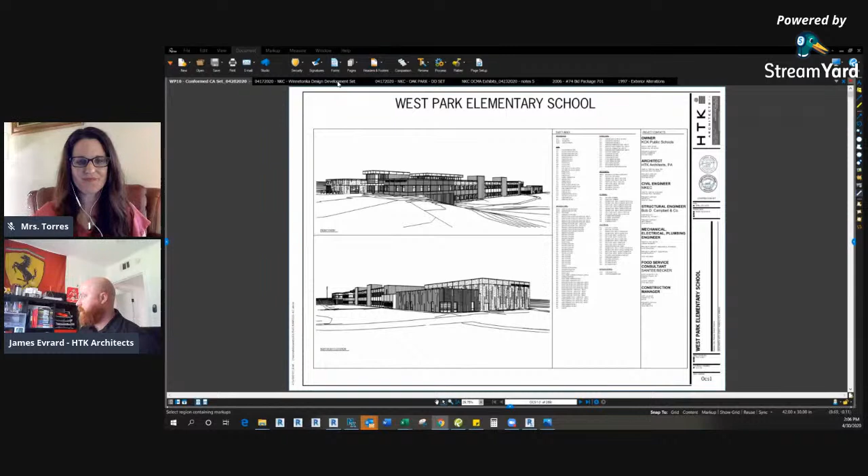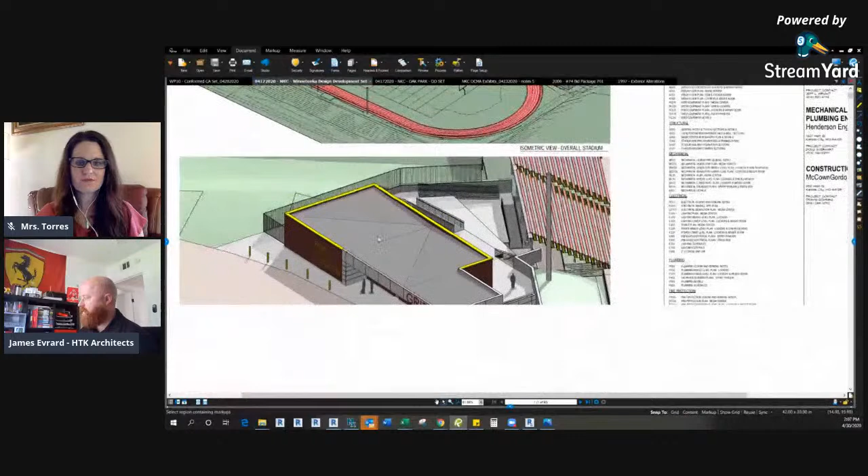So part of what I'm doing at North Kansas City is we are doing some stadium upgrades for Winnetonka. For the first time in the 50-plus year history of the school, we're adding a stadium component. We're also doing a new sports pavilion, a place to enter and have fun, extending the experience of the school to the fields, since the football fields never had a place to congregate and socialize.

So I'll go through some of the drawings that we just put together. Let's see, get to a fun plan. Sorry for the lag time.

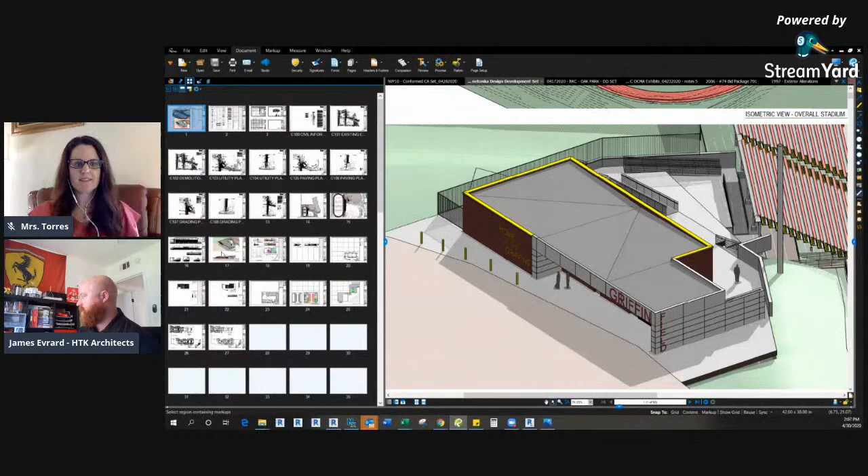While you're pulling that up, could you share what software program you are using to create these? Yes, so this is being created in Revit, Autodesk Revit 2020. It's a 3D modeling software we use to develop all the creative aspects of the project, but also the nuts and bolts pieces. So you can see here that this is all in the model that the image I showed.

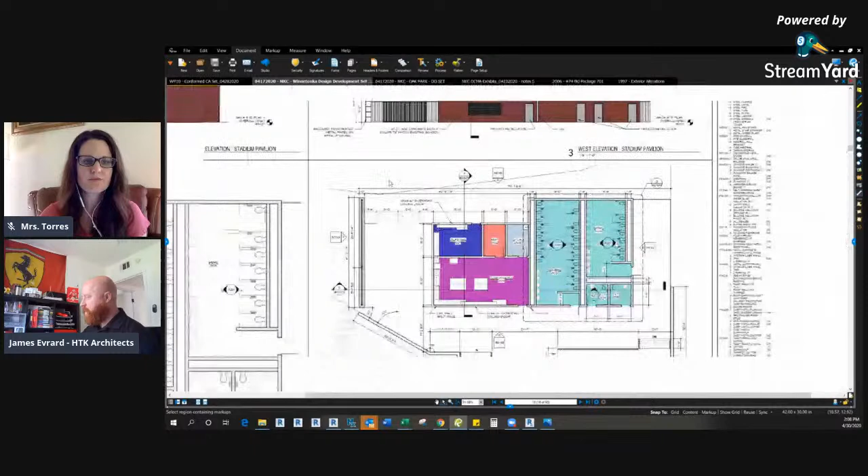So you get into the structure of it, how it's supported, various pieces like plumbing, wiring, infrastructure, all to help create these buildings that we are modeling virtually. So I still hand draw a lot, but ultimately those squiggly line drawings eventually translate to these very measured models.

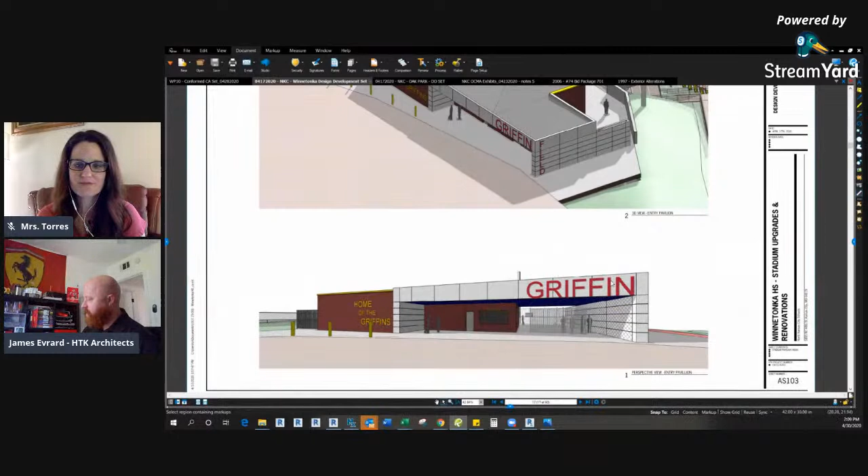So this is just one of the pavilion buildings that we did. You can see some of the 3D views of it that are part of this model. So modeling the brick, custom signage, metal panels, looking at how people interact on the site, and how close we are with the stadiums themselves.

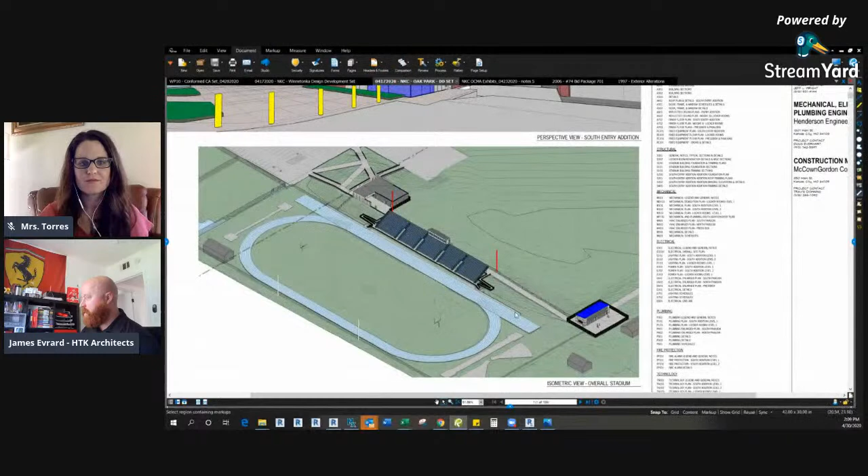So that's something going on at Winnetonka. I'm also doing some fun projects that are a little similar at Oak Park, where we're doing also a new stadium bleacher section. But then we're doing some other pavilion buildings - there's a home building and a visitors building, and these will help broaden the experience of the students and community alike to experience these projects.

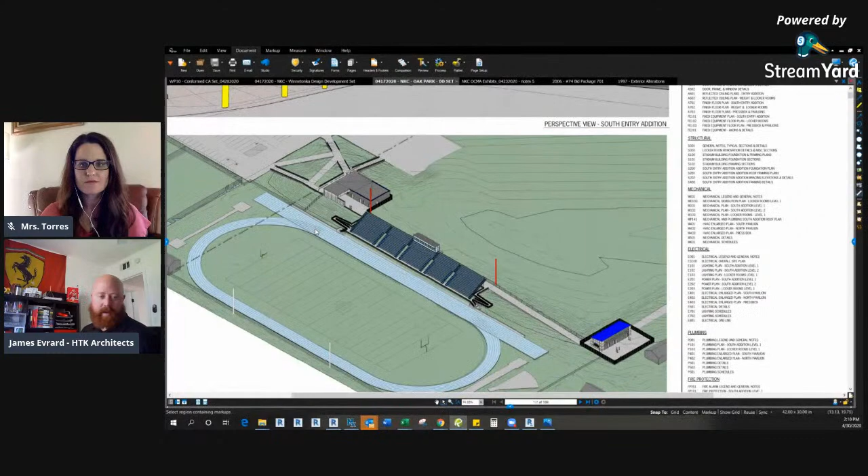Because once again, Oak Park was designed with just the track and the football field, but no bleachers. So it's trying to enrich the school through design and expand it, trying to figure out the legacy of where the school wants to go, but also provide really fun opportunities for students such as yourselves to take part in. Another fun project we're doing is a whole brand new entry to Oak Park itself.

So this is actually on the south side of the school, where the original entry is on the north. With the way the school has functioned over the years, the majority of students and faculty all experience the south. So now we are actually trying to flip the whole thinking of the school on its end and design and add to the back of the school, redefining its entry sequence.

So a very new prominent entry. And if you're familiar with the other schools, Winnetonka itself actually just went through this process. So it's kind of a nice opportunity to be able to expand on a very historic school and then redefine how it works moving forward.

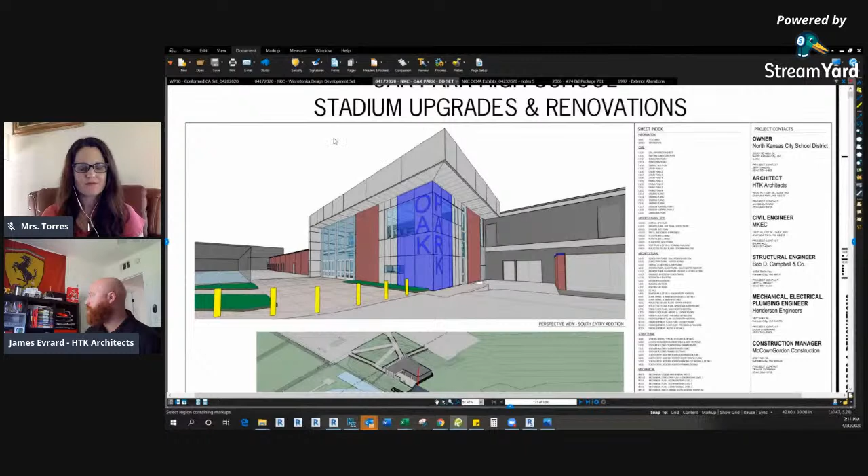So let's see, I'm going to share another screen of what I'm working on. As I said, this was Autodesk Revit. So if everybody can see, this is the addition I just showed at Oak Park. Just to give you guys a little taste here, it's kind of crazy that we build all these things - you can see how big the model is.

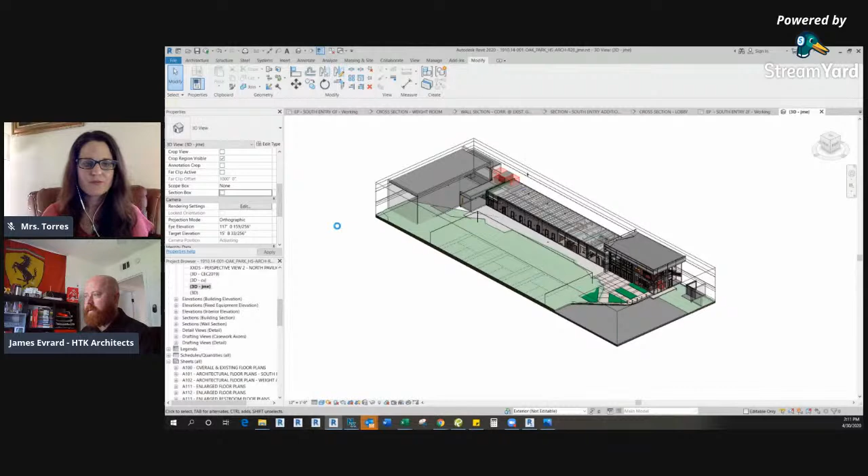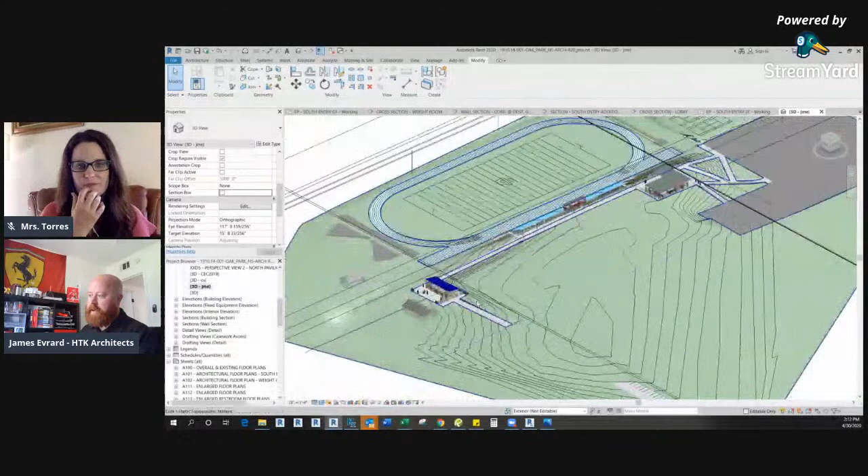So there you go. So I've modeled basically the entire existing school, and we have the topo model of the site itself all the way to Paseo, or Troost, and then we have the pavilion building, the new press box on the stadium, and we have the South Pavilion that will be part of Gladstone Park.

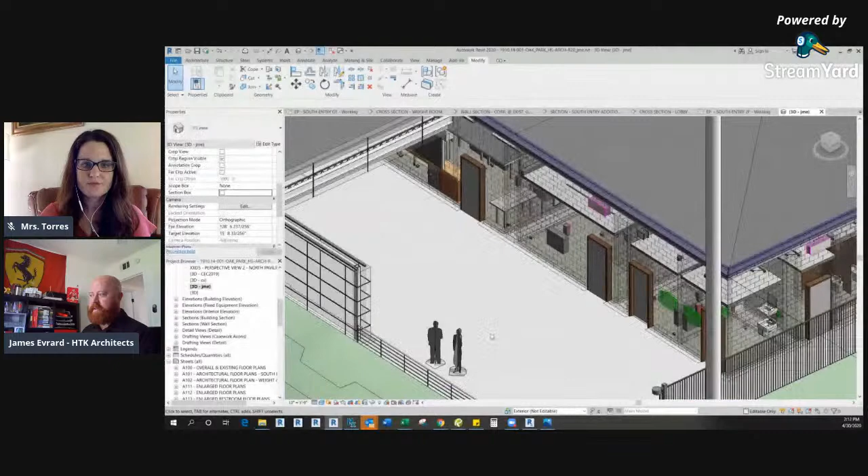So you can see it's understanding and drawing, figuring out all these different projects located on a site and being able to interpret and figure out. So you can get all the way down to the detail of the people, the doors. You can see sinks in the model itself. So it's understanding all these components, how they work.

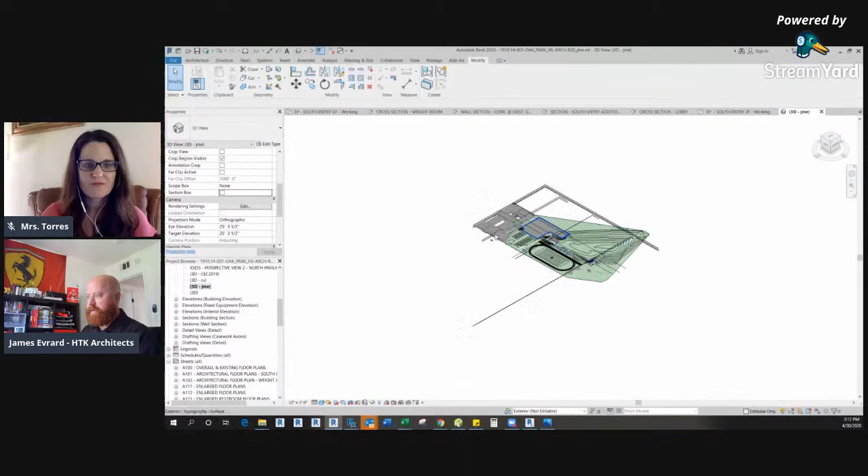And then the other fun thing you get to do is kind of break through them. Let's see, I'll go back. And then you draw these orthogonally and also digitally. Let's just go back so I don't lose my place.

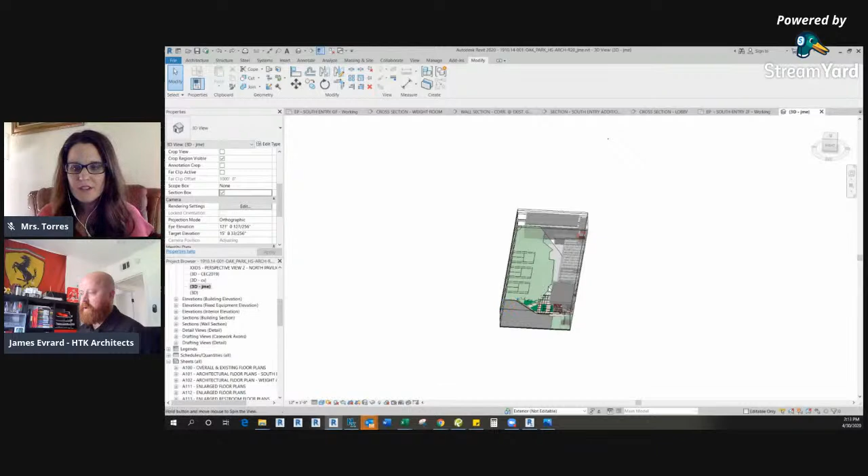So this is the entry addition that I'm working on, and you can see how all the bits and pieces of the project are displayed.

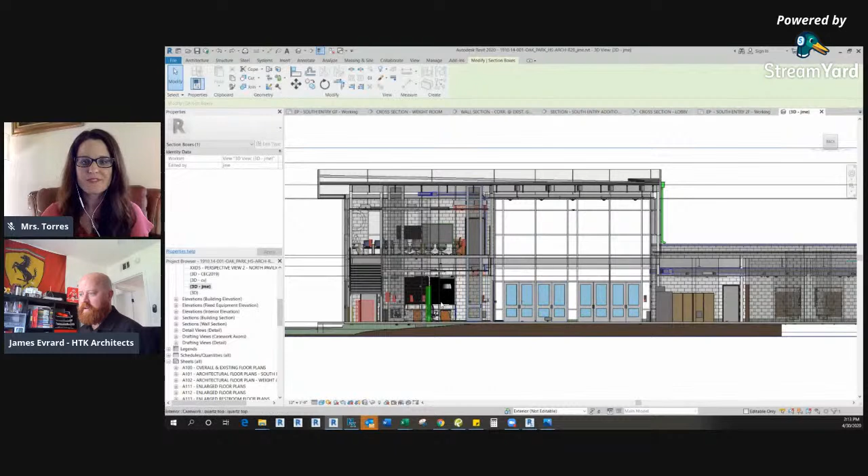This is looking through the model of the entry. You can see sites, or the circulation of the stair, rooms beyond it. This project has a new weight room, so we're working on designing that and how it interacts with the school.

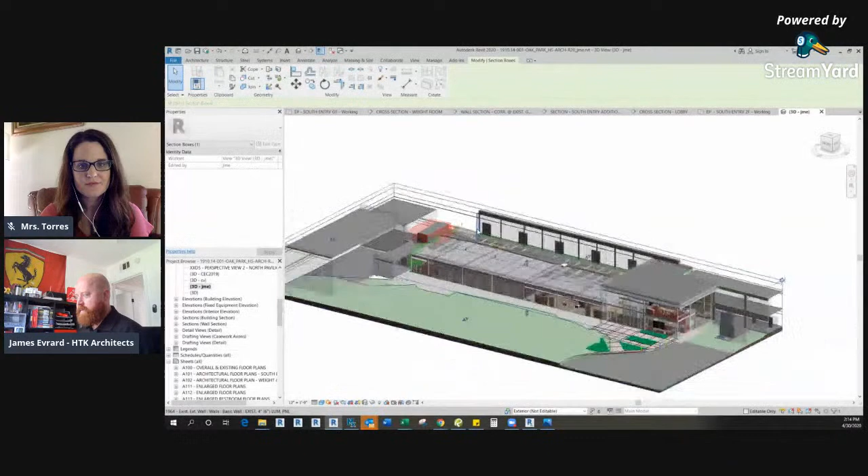Really fun to get all these parts and pieces in. So there's the face of the existing school itself. And being able to go through and understand how spaces work, how circulation works, design elements. So we have some really fun floor patterns happening on the ground, desk and chairs in a conference room.

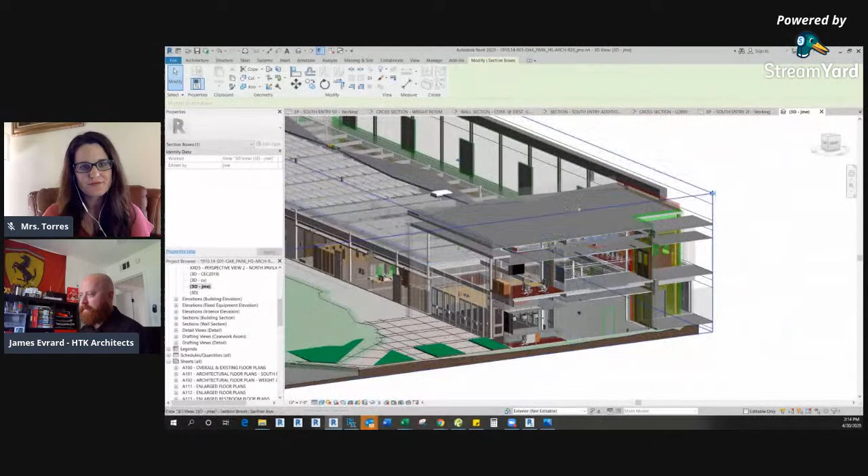Cutting further in, here's this very big two-story entry space here. So this new vestibule, and then getting into the lobby itself, and a classroom that overlooks it, or a conference room.

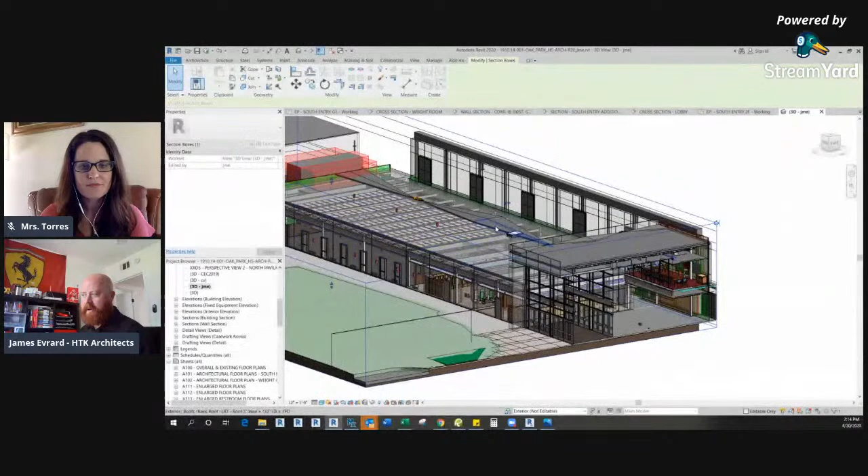And then we're also looking at other things like how the roof drains, where we put our mechanical equipment. The fun thing about this part of the school is it's part of a phase that will eventually expand to where we're going to add another floor to this, and we'll remove the existing tennis courts and do a performing arts center down the road.

So it's kind of fun to be able to, at a point in time, add on to a project and expand how that experience works, but then also set up the project for future additions as buildings constantly evolve. The Sage building is relatively new.

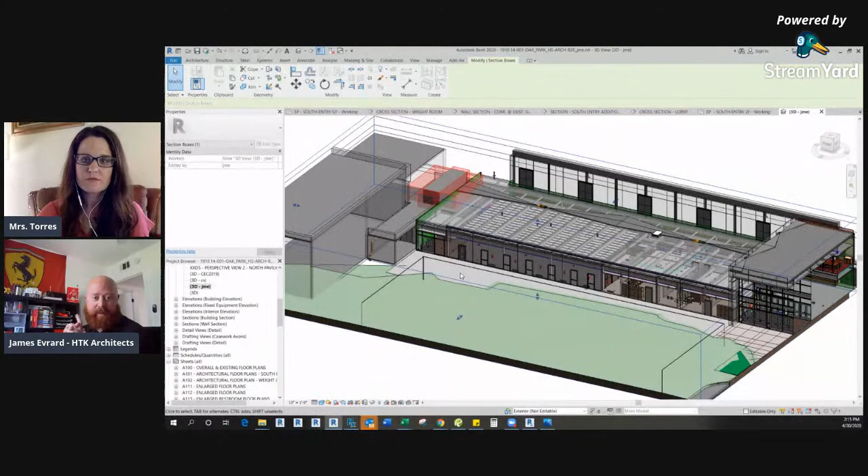It's probably about under 5 years old. So that building is still being used and people are trying to understand how it works. And that project I did for the expansion was only within a couple years after it was built. So you can see how projects evolve.

That's so cool that you are showing us the future of several buildings in our district, and cool that you guys get an inside sneak peek on those. While we're here, I'm going to go ahead and ask Basia's question.

How do you get inspired to do these things? She also wanted to know, in a later question, how you deal with a block when you can't think of any new ideas.

So being inspired in general, I think I've always been a curious person, so I'm always trying to figure out things. I used to take apart my toys when I was a kid, usually right after I got them, just to figure out how things work. I think through that process I get inspired, through the process that there's a way that you can solve projects and problems.

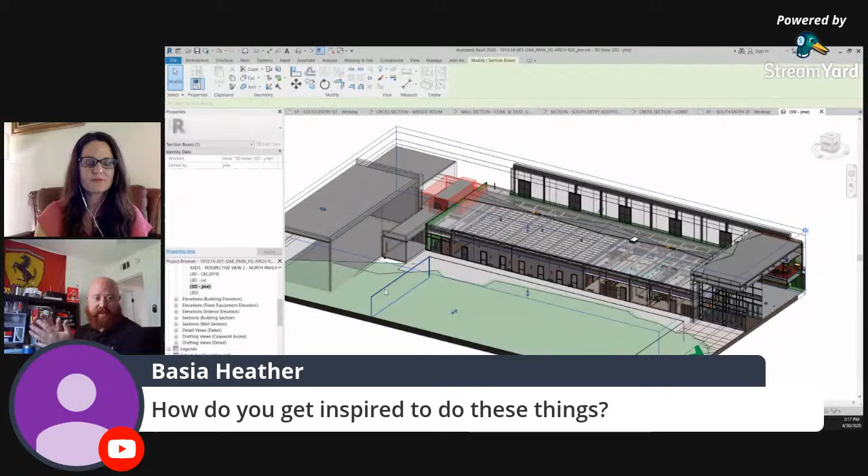So understanding the creative solution of this. Right now I have an existing building, we have to go somewhere, and logically there's only a few places to go. You kind of go through a process of elimination to understand, okay, you have these variables, it needs to be this big and this small, or this wide and this tall. Those limitations help you be creative and get excited to figure it out.

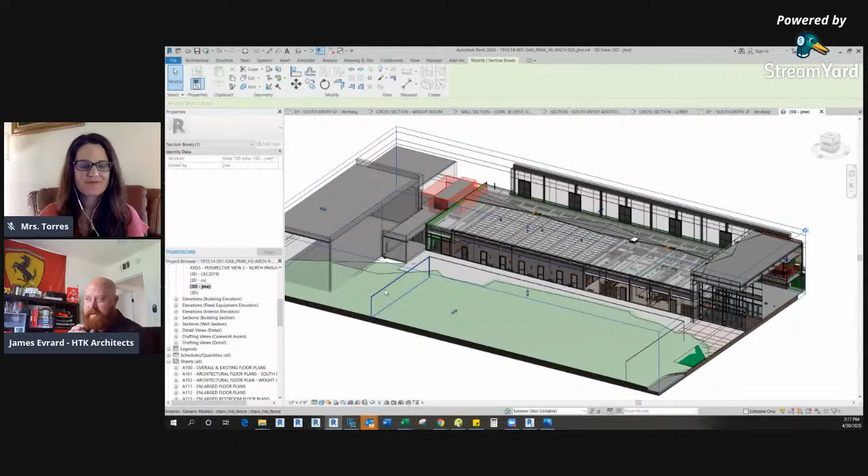And I look at a lot of things. I love drawing, I love sketching, I love drawing crazy shapes and odd problems. I like my artistic side, the fact that I draw, I doodle a lot. And with that, I try to understand that the more I can figure out how things go together, the better I'll be.

So that goes with her second question, of when you hit a roadblock you need to be able to step back. Since I've been going through a process with this, I have a roadmap that I can look back on and see what worked, what didn't work, and what I can do to make it better.

Usually I go back into my own little world, like okay James, you did this before, this is why it didn't work, what can make it work now? So through a series of steps, because you never really want to get bogged down thinking there's just one solution to a problem. There's probably many solutions, so it's just understanding that.

And you get frustrated, but it's good to understand that through frustration you can get little breakthroughs and have aha moments. So that's pretty fun to go through that.

That's great to hear you say that, because those are the things we keep trying to reiterate with our students, that sometimes frustration is what you need in order to progress and drive forward. Also, there are several other great questions on the side here, thanks you guys for asking all of these.

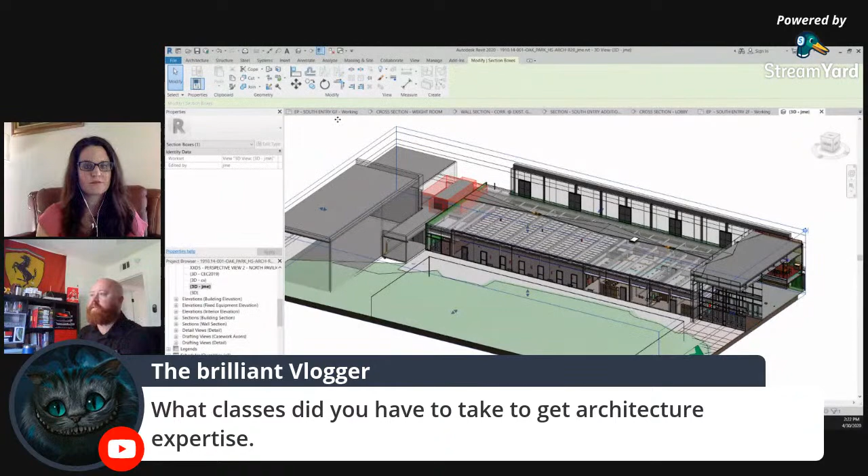And those are all in relation with each other, like where the mechanical equipment goes, where the structure goes. Within this program I'm doing, I'll actually show you a ground floor.

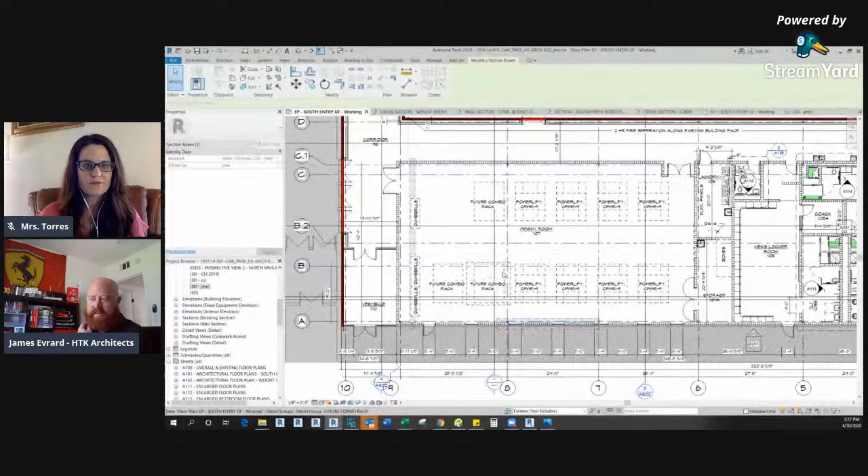And right next to the existing building, there's a lot of things going on that you have to understand. Those courses in architecture school help you understand how those relationships work, so that by the time you're a licensed architect like myself, you have an understanding of them.

And then there's other fun things that you get to do, like we got to take speech. That was fun because architects have to be able to talk and communicate with people. I took a lot of sculpture and painting and figure drawing—fun non-building related courses to keep me creative.

So yeah, the architecture program really sets you up with milestones and requirements that you have to meet to go through that College of Architecture process. And other schools have similar ones as well.

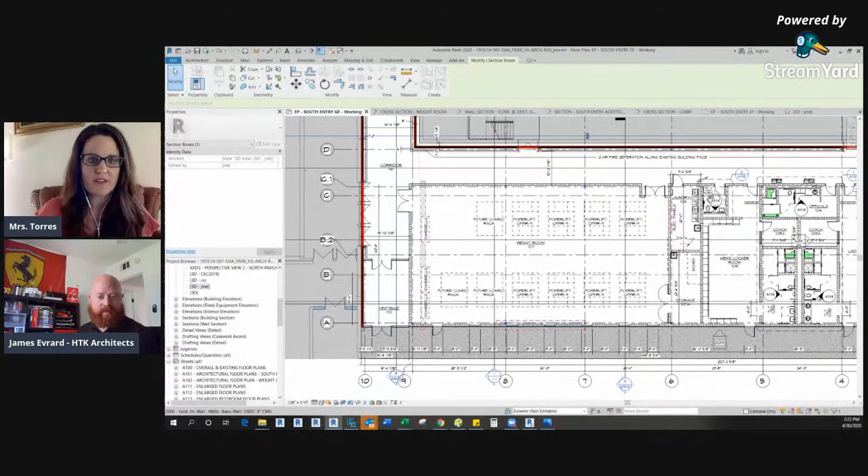I think don't be limited to just thinking about architecture. Think about your own hobbies and influences and how those translate into being creative—those help broaden you as an individual, and you can take those strengths into how you design.

I have sketchbooks everywhere right here. I have a Ferrari flag, so I'm really into car culture and art. I really like being inspired by beautiful things and how those things were created. So I think you always want to be a well-rounded kind of person that you can bring your strengths to your projects and your team.

That's another thing too—you want to be communicative and be a team player, because a lot of the projects I work on are not just me. I have engineers, owners, building officials, contractors, tradesmen, younger architects that I have to help with that have recently been out of school and need to learn. So understanding how everybody works together helps. The more you can be personable and communicative and understand other people's thought processes, the more you click and make a project better.